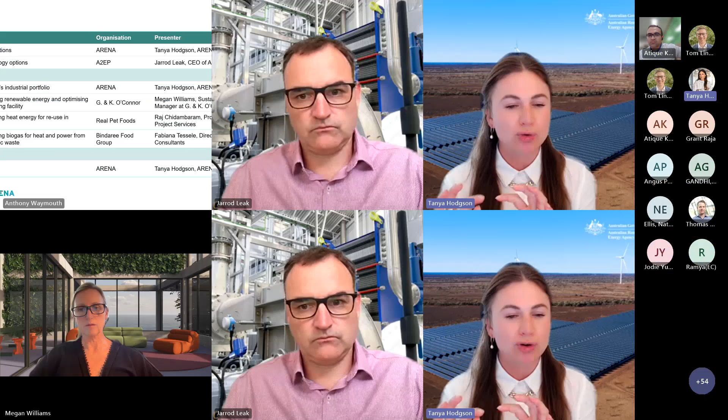questions. Okay, I've lost Tanya. Anyone else?

Hi, yeah, I think we lost her. Yeah, she's gone. Jarrod, this is Atique, I'm from Real Pet Food. We have our engineering department head trying to join the meeting, I don't know whether you can help out with that. I can help with that, Atique, I'll send a link in the chat for anyone to pass forward to others if that's a suitable solution. Well, hopefully we have the rest of the ARENA team as well who might be able to help. But let me get on that link for you while Tanya reconnects. Sure. I'm sure Tanya's thinking, yeah, my internet was fine all day until now, and then 100 people join a call. Yeah, exactly, that's strange. Tom, maybe you want to take the lead there? I don't know, we've just heard from Tanya, apparently we've had a blue screen of death incident.

So we'll pass on to Jarrod and get started with that one. Fantastic, all right, thanks Anthony. We'll skip through to the next slide there, and just a very quick introduction on A2EP.

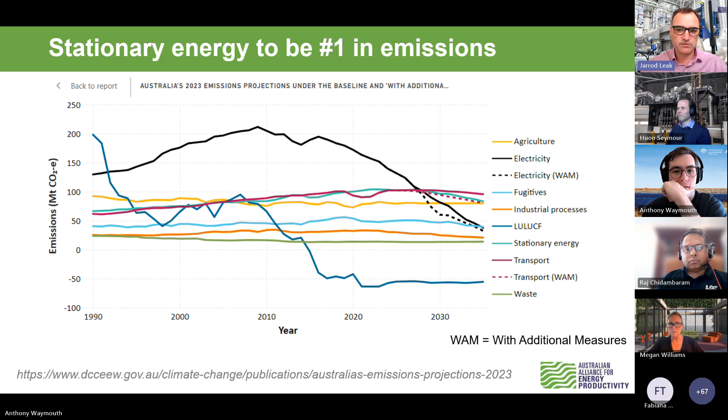If you look at the next slide and see where we've come from and where we are in Australia, we are probably a bit behind what Europe has implemented in terms of technologies and options, certainly when it comes to biomass. But we're probably ahead of the US, who had a decade or so of stagnation there. A lot of the work was done in terms of publications around 2017 to 2019, mapping out the opportunities and the technologies.

And there's just a few of those publications shown on the top there, and then they've been built on over time. With ARENA, we did a series of 30 or so studies come 2020 and 2019, where we looked at all the different options for technologies, and that's where we had a lot of our foundational knowledge on what works and where and how. We've been working hard to build on that over the last 4 years since then.

Other work has been done by the Race for 2030 CRC, and if you were to look up their opportunity assessment for decarbonising heat, there's some great information on there. Finally, there's the harnessing heat pumps for net zero by the Energy Efficiency Council and A2EP, published a year and a half ago or so.

Along the bottom, just a few sample projects. The very first heat pump, industrial heat pump on ammonia, went into Thomas Foods installation in South Australia in 2012, a Mayekawa compressor project there. So we've had them around for quite some time.

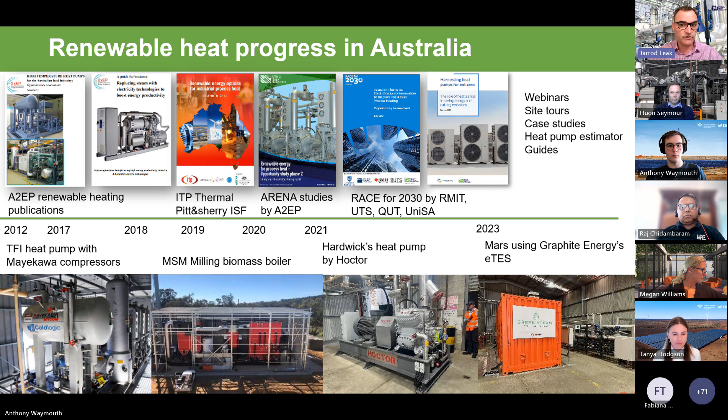Latest work done by A2EP is a boiler mapping exercise. We think we've reached somewhere around 20 to 30% of the major boilers and burners across Australia to find out what their intentions are in terms of decarbonising their heating and a little bit of a time frame for that.

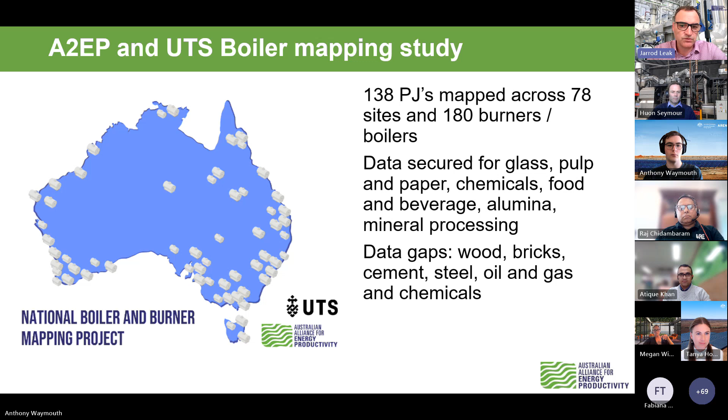The data that we had did cover a fair bit of industry. Although there was some gaps, we didn't do too much in wood processing and bricks, cement, steel, or oil and gas, but we did cover off pretty well through alumina and food and beverage and chemicals and mineral processing. So we think we got a fairly good snapshot.

On the next slide, you'll see one of the key findings was that nearly 40% of the burners and boilers out there are due for replacement in the next 5 years, which is the good news. Certainly, if you've just bought a boiler or a burner in the last few years, that's going to make the financial case extremely hard to bear new technology as well as the depreciation on the old technology. So plenty of opportunity certainly here and now.

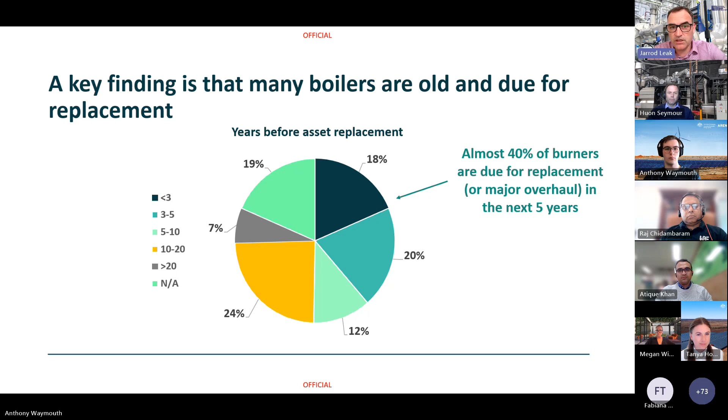On the next slide, you'll see a bit of a vector of where things are headed. Electrification was by far the number one, followed by biomass and then biogas. A very large chunk is still undecided, and that was through the many interviews we did over the last 12 months or so. So there's still a fair bit of work to do, certainly with studies and what have you. So electrification, biomass, and biogas - that's the three main areas that we think the opportunity is.

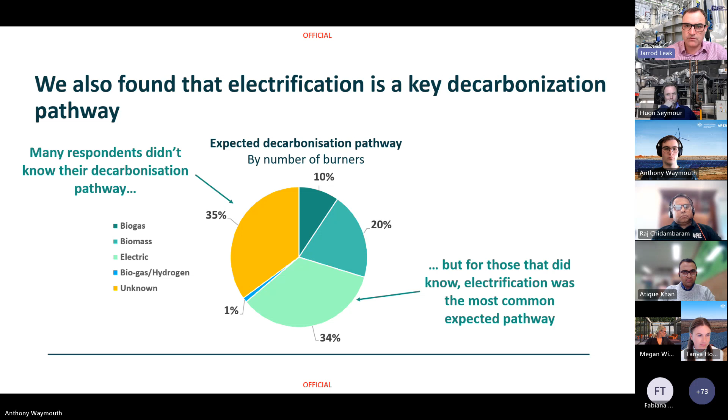But we see that moving towards bioenergy and additional renewable electricity. A lot of opportunities start becoming evident with energy efficiency once you start looking at things like electrode boilers or hydrogen as well, so we certainly can't leave that out. We also get a lot of efficiency gains as we use things like heat pumps or mechanical vapor recompression, which delivers, say, 3 or 5 or even 10 times the amount of thermal energy for one input of electrical energy.

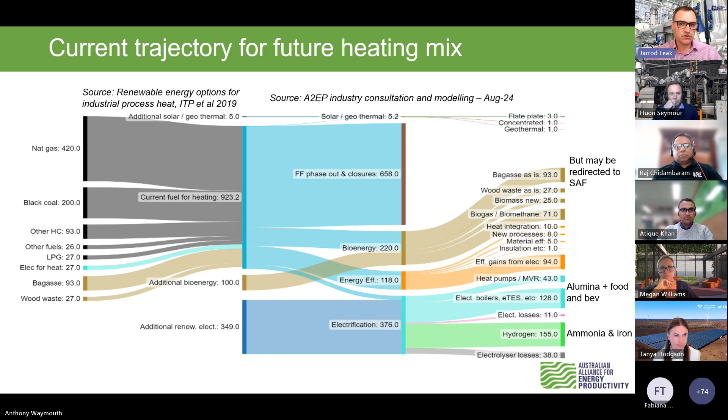A very big piece of work, good piece of work done by ITP there. If I just go back one slide there, Anthony, just to show that little bit of a breakdown there where we sort of see things headed.

For those higher temperature requirements for bricks, cement, glass, we expect a lot of that to be done by biogas and biomethane, some hydrogen, and some electrothermal energy storage. This mid section, around 200 to 300 degrees, you've got a lot of choice between biomass and boilers and what have you. And the bottom section, the lower temperatures, we certainly see heat pumps and MVR, solar thermal and geothermal to absolutely dominate there - let's call that 150, 200 degrees and below. That's going to be the most economical solution there, likely going forward.

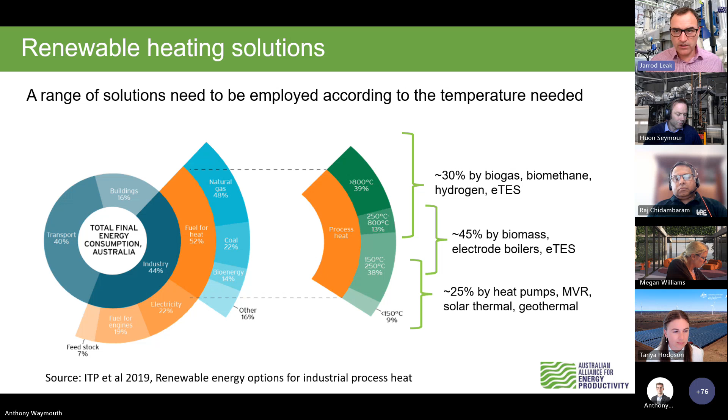A little bit on the specific technologies on the next slide, you'll see a breakdown on that CapEx and things. Geothermal is very cheap, almost no OpEx, just some pumping once you get it running, but the cost of drilling is quite expensive.

Great opportunities in Australia. The War Memorial in Canberra has just opened up with a fabulous geothermal heat pump solution, but also if you look at the Latrobe Valley, we've got an enormous resource there for straight geothermal, and it has been used for aquatic centre heating and the same in WA around Perth.

Biomass - we've got a fabulous resource. This is where we're definitely behind most of Europe. They've really gone to good lengths to get the most out of their biomass resources, and I mean waste biomass, waste wood and sawmill offcuts and residues. It is a more expensive technology, but with a low feed or fuel cost, it is very economical.

Biogas and biomethane - excellent for these high temperatures, but the cost to develop a new project that will give you the gas you need is quite expensive, and there is definitely regulation problems holding that back at the moment.

Solar thermal really can be quite economical, definitely below 100 degrees, even up to 200. We see that playing a reasonable amount in decarbonisation, even though it's been rather quiet over the last 10 years. We think that's going to happen more there - we're watching that one.

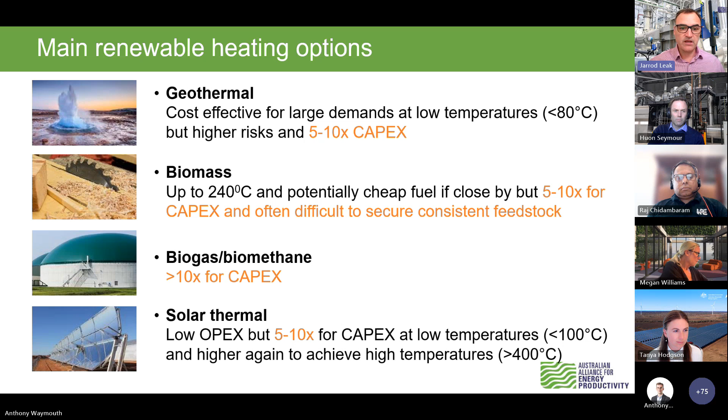For electrification options on the next slide, you'll see we've got the likes of hydrogen - essentially unlimited as long as you've got the water and can get the renewable electricity there. But the high cost per gigajoule, we expect that to maintain for many, many years, probably looking at a 2030, 2040 type solution for the technology.

Heat pumps and MVRs - that's absolutely here and now. The products are here, the solutions are ready, and we're now getting a lot of installation examples out there to learn from as well.

Heat pumps are really pushing into that 160 degree range, with more happening in steam-based heat pumps. And then mechanical vapor recompression is pushing towards 240 degrees as well. So that's moving along pretty well.

ETES, electric thermal energy storage, is great for those higher temperatures and for those mid-ranges as well. You've got the likes of graphite I showed before, MGA Thermal and Rondo on the big end, and I've got a slide for that.

Finally, the other one is electrode boilers, the other main electrification option. We've already had these in Australia, like at Tasmanian dairies, and we're seeing some more installations likely to happen in the next 12 months as well. Definitely higher in the capex compared to a standard natural gas boiler, but certainly a great decarbonisation option, and gives you that drop-in fuel situation where you provide steam at the same temperatures and pressures as before.

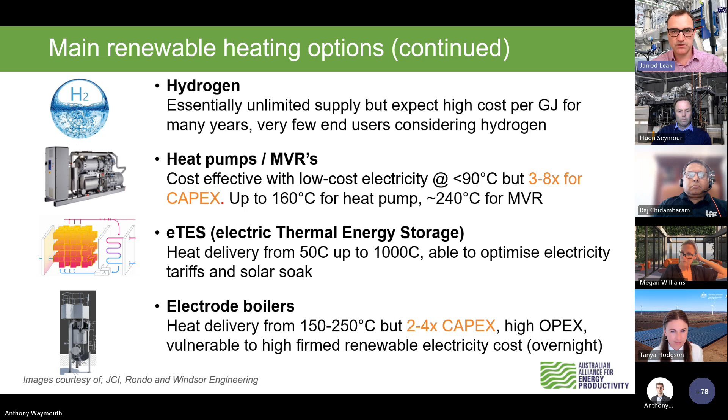On the next slide, I'll just jump over this one quickly, and I think most people will get the pack. I've just tried to show where these different solutions and options sort of fit in, with a little bit more granularity of different types of heat pumps and the like.

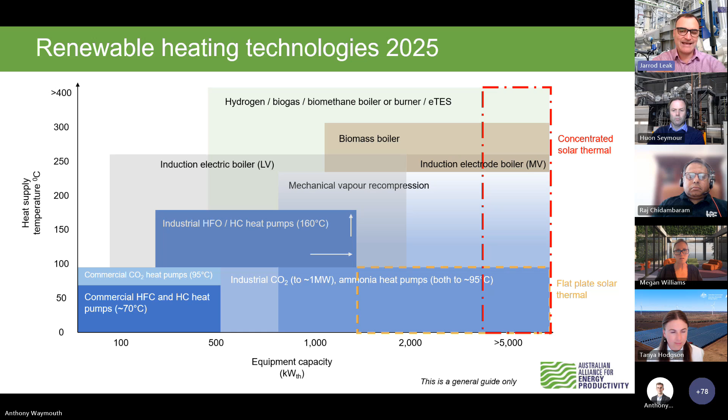So if we get into a few examples now, you'll see this next one coming up is a mechanical vapor recompression project that went ahead in New Zealand a year and a half ago, used for a sugar refinery, and can perfectly be replicated across our refineries in Australia - 5 or 6 refineries that we have - but also in many other applications.

Wherever you're doing evaporation, that could be fruit juice - sugar mills could employ this to free up more of their bagasse. But anywhere you're doing evaporation around Australia, this is going to be an excellent viable solution. I draw your attention to that 18 times more efficient than a single step - like a COP of 18, it's really one of the most unbeatable technologies to decarbonise that we have available.

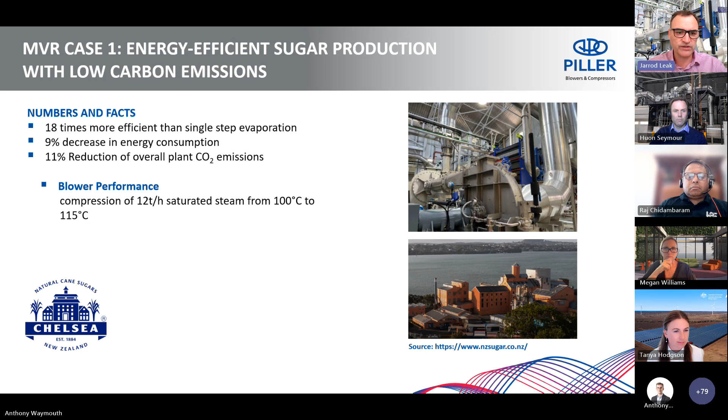On the next slide, you'll see that this is being considered on a very large scale, and Alcoa has been looking at this for running their digestion and spent liquor evaporation plants. They see it as a very good opportunity, and they've been doing some trials over the last year or two, with ARENA's assistance, which we think will lead to more projects down the line.

This is going to be a big part of the decarbonisation story.

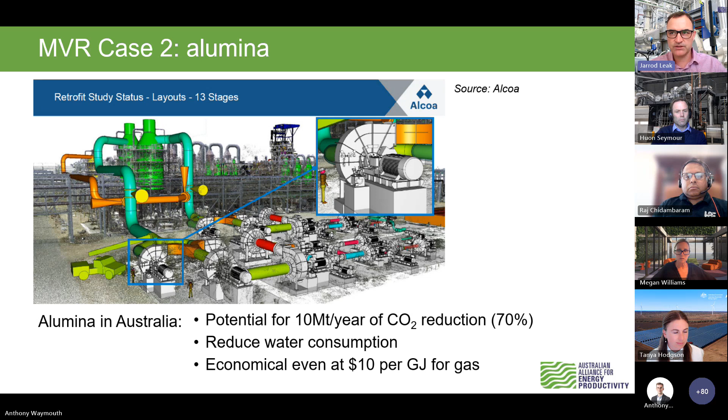Moving to heat pumps, here's another ARENA-assisted project at Kyneton for Hardwick Meats, now owned by Kilcoy Global Group. They have hot water needs for their abattoir, with the heat pump producing 75-degree hot water, currently stepped up with a gas boiler to 82 degrees. But there's further growth in performance from that heat pump, made by Hoctor with a Mycom compressor, now pushing up to about 80 degrees already.

Not much gas used there at all. This is a fabulous system, fully integrated with solar, wind and batteries, along with existing waste heat from the refrigeration plant. A fabulous project with very good results, very happy with that one.

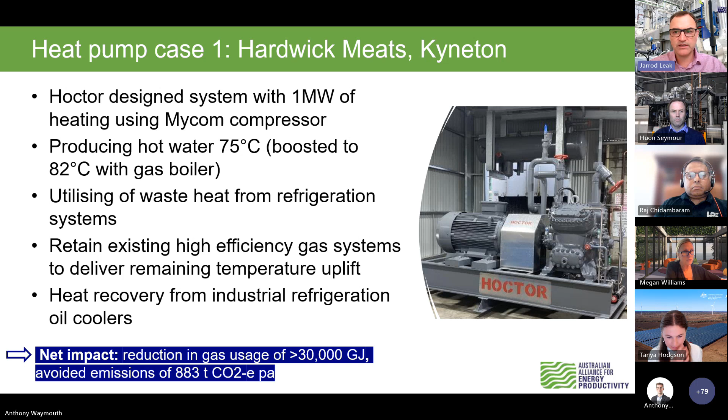On the next slide, a bigger example - not just 1 megawatt, but up to 130 megawatts. This is MAN Energy Solutions' heat pump to produce steam, and right now Fonterra in New Zealand is going through a study to see how they can utilize this technology. So you can take heat pumps from your house for a kilowatt or two all the way up to 130 megawatts. It's quite the technology, and with high COPs, we'll see more of that.

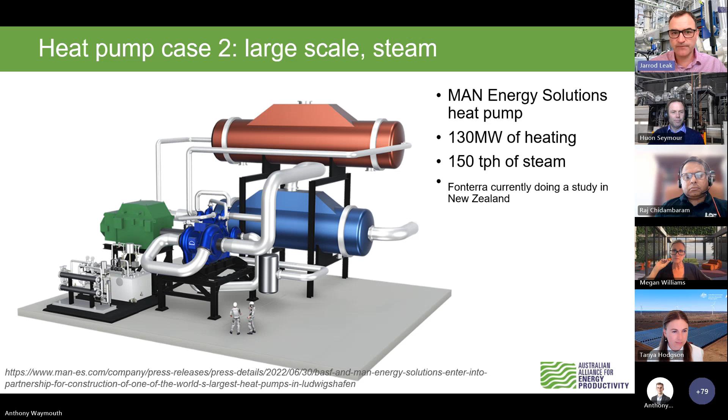Introducing Mars - here's Paul Matushka, one of our absolute leaders around the country for pushing these solutions. You'll see the graphite energy installation at Mars Wodonga, providing steam straight into the existing network, with really good seamless integration, delivering steam at a very similar cost to their previous boiler.

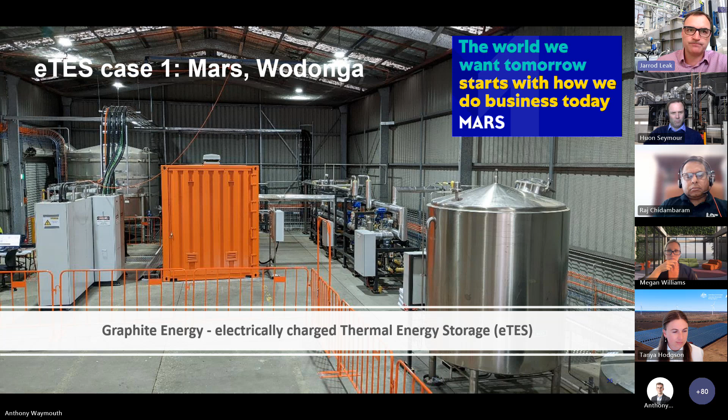Electrode boilers now - just one case for you. We had this at our recent Renewable Heat Conference: Paddy McMillan from MVM in New Zealand. This was an exciting project, up to 14 megawatts from a steam electrode boiler, getting fabulous results and loving it. The interesting point, most people found, was that it required 17 different partners to bring it all together - quite complex, and a successful project needs a lot of partnerships.

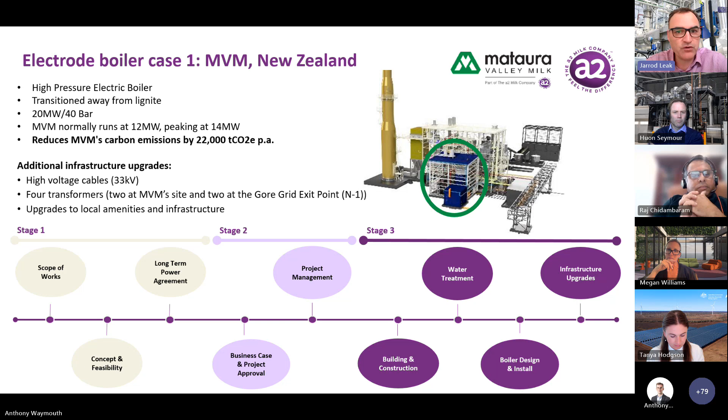To finish with a couple of biomass examples - this is one from Enriva for Van Wyk Flowers in Lyndhurst, Victoria. This is a 3 megawatt biomass boiler providing heat for the glasshouse in the evening, and I understand also CO2 during the day for fertigation to help with glasshouse growth rates. That requires a big thermal storage - some 2 megalitres of hot water tank - an enormous tank, but that's what you need to build up heat during the day and use it overnight.

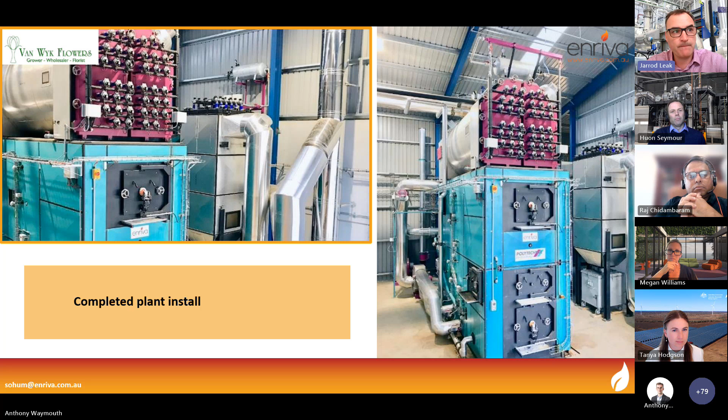Finally, a second last case study that can be done on a very large scale as well - here's 80 megawatts of biomass boilers being done by Borg in Mount Gambier for their processes on particle board.

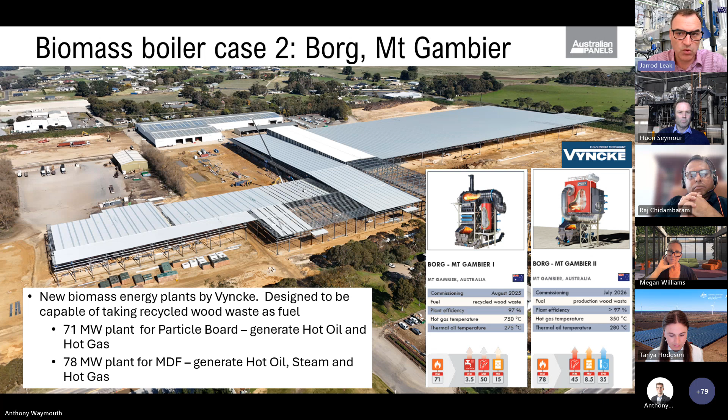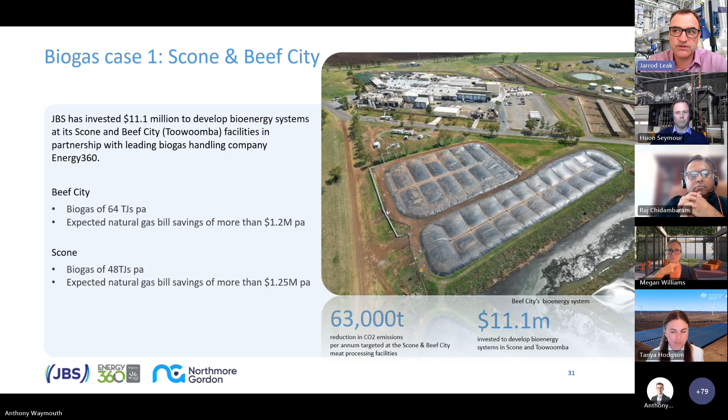The very final one is a biogas case, and this is from JBS, the biggest food company in the world. They're moving on with capturing their waste and using a covered anaerobic lagoon to get the biogas from that, and use that in their boilers to displace natural gas. Getting great results, great returns, and we're sure we'll see many more of those projects happen in the meat processing industry.

And I can take a breath now. Sorry about the overload, but that gives you hopefully a good flavour for what's happening and where we're at with things there.

Is Tanya back online? That's the question for the day. What a perfect time to blue screen. It's Murphy's Law. Thank you so much, Jarrod, that was excellent timing to the minute.

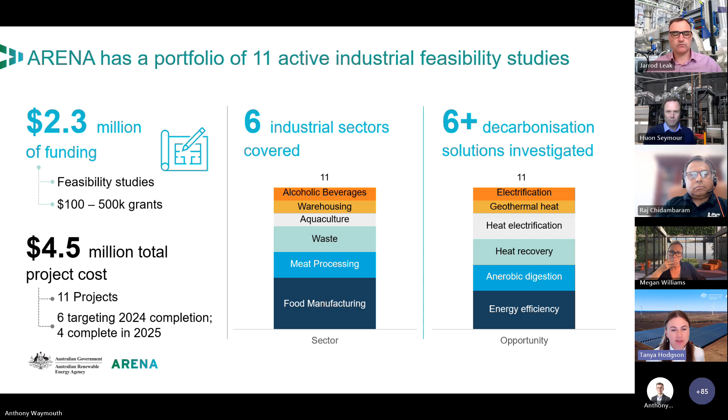So maybe Jarrod, just before we move on, and this was the end of my pitch for ARENA's portfolio, there was a question just asking why Van Wyk Flowers went for a biomass boiler rather than heat pumps. So perhaps we address it here before we all forget the context.

Yeah, absolutely. I don't know the specific reasons, but I do know generally why that would happen, and that's often about the electrical constraints. So that project was a 3 megawatt boiler, and so you would need at least a 1 MVA connection, and that's probably a little bit hard if you're out in the regions, and that would be much larger than what a typical horticultural grower would have already, so may have required that upgrade there.

Heat pumps are also more expensive per kilowatt or megawatt of energy supplied. And the other one would be that biomass may well have the edge because of the CO2 that you can get from that, and fertigation and the improved growth rates that you'll get when you have that higher CO2 concentration inside the glasshouse.

Certainly, we've seen several glasshouse and nurseries go ahead with heat pumps, say when they do have that connection available, and they may not need the CO2. So we've definitely seen projects go ahead - I think it was Zaldesh Farms in WA, just one example, went ahead in the last 6 to 12 months with their heat pump installation there, and that seems to be, from what I understand, performing very well. So yeah, it's worth considering, I'd say, for horticulture, both options, and seeing what suits best.

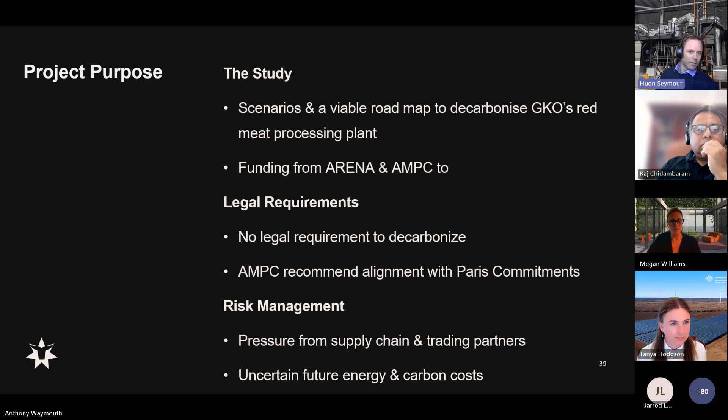All right, we'll step on to milestone 1. So milestone 1 was to implement a metering and monitoring system.

This was needed because there was no existing baseline or measurement to create one. So we had to go about measuring the existing plant operations, specifically plant activities on site, scope 1 of burning natural gas, and emissions from the grid. We didn't cover scope 3 emissions as part of this study.

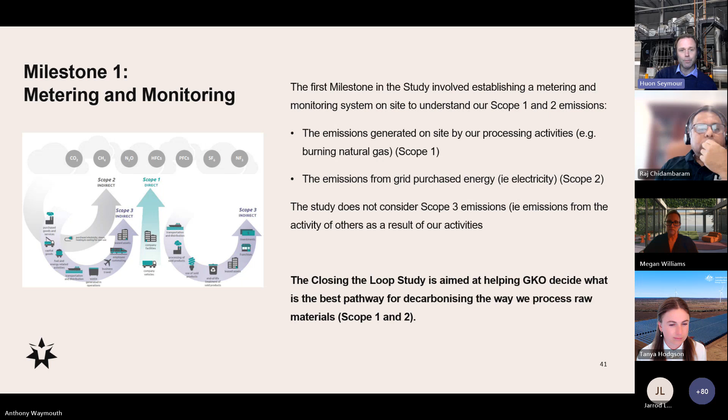What the metering and monitoring system encompassed - beforehand, it was literally people with clipboards. There was a manual system. They would, on an ad hoc basis, collect data, and it wasn't centralised anywhere.

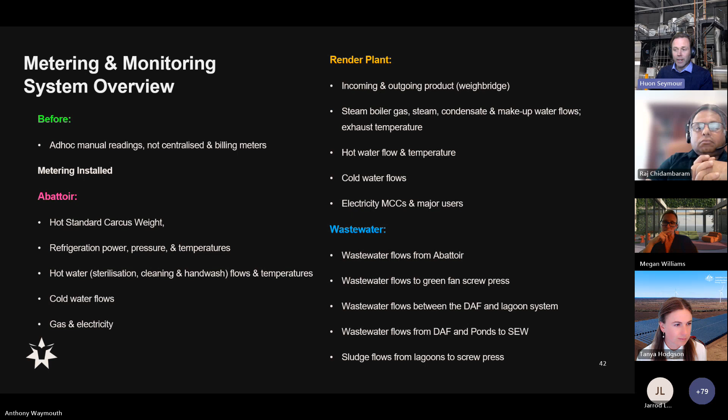Afterwards, we implemented a system in which we monitored electricity and gas across the abattoir, render, wastewater and refrigeration plants, hot and cold water in both the abattoir and render plants, gas on each boiler. There are 3 of them on site. Steam, we monitored the entire steam boiler in the render plant, and products in and out of the abattoir and render plant and wastewater flows.

The monitoring system itself that we've created here has automated and centralized data collecting in a historian. It displays trends and reports data using an automated dashboard. The dashboard provides energy trends and breakdowns, KPIs or energy performance indicators for the whole site and each of the abattoir, render and wastewater plant, a build your own chart function with all of the data points available, and an ability to download data for further analysis.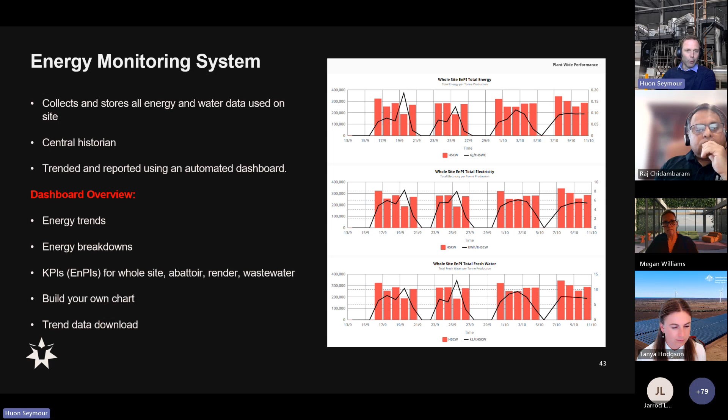And the wastewater system has a great deal of heat being sent down to wastewater, and as well as you can see losses in the boilers and the waste heat evaporator on site.

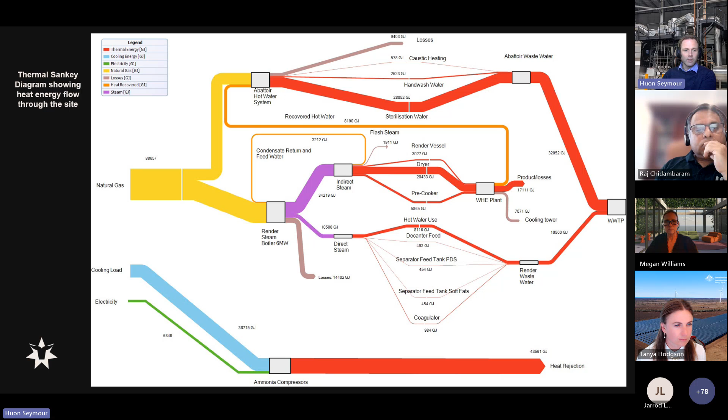Stepping forward, this is looking at milestone number 2. This is the integrated scenarios portion.

In order to provide the necessary detailed understanding we needed, we had 4 technical reports completed as part of this study. Johns Environmental did one on covered anaerobic lagoon and biogas. Northmore Gordon, my company, completed one on thermal process integration and electrification. We had Beam complete one on solar PV, batteries, cogen, and an economic feasibility, and we had Enhar produce a grid and peak demand study.

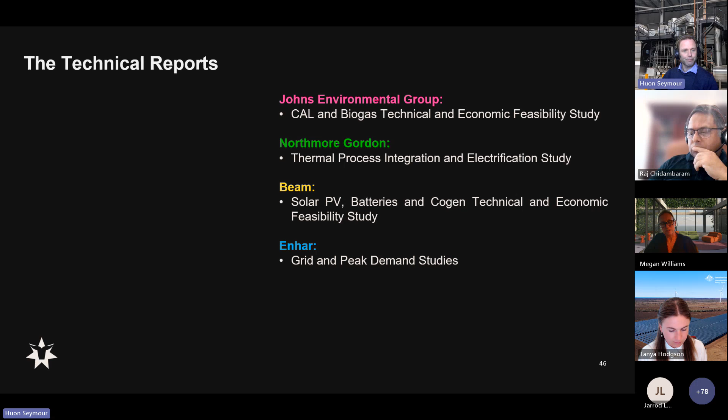Technologies we assessed as part of the roadmap were solar - on-site PV, and thermal storage that inputs electricity and outputs steam that Jarrod spoke about earlier. Biogas - a covered anaerobic lagoon to produce biogas for use in the steam boiler. Energy efficiency projects such as waste heat recovery, heat pumps producing hot water combined with thermal energy storage. Electrification - directly converting natural gas uses across to electricity, such as electric boilers. Biomass boilers, in the other category there, that's using logging waste.

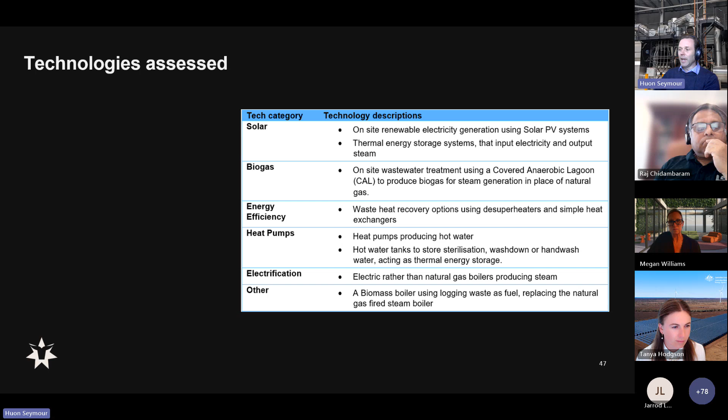We ruled out electric batteries due to payback and the sizing for the required storage we needed, and we didn't proceed with cogeneration due to concerns about reliability and energy cost exposure.

For integrated scenarios we considered with this study, we had basically a technology focus for each one. Solar led maximises the amount of solar capacity installed and utilises the excess solar for thermal storage. Biogas led, using a covered anaerobic lagoon with the on-site waste processing to substitute a portion of the natural gas, used for steam generation in the render plant. Efficiency led - cost-effective energy efficient technologies, and we put the biomass boiler into that scenario. And the final one is full electrification, which was replacement of all natural gas consuming equipment with electric alternatives, on-site storage and procurement of renewable energy or on-site generation.

Our evaluation methodology used a multi-criteria decision matrix, scoring each project in each scenario against the criteria important to G&K O'Connor to produce a combined scenario score. We then applied a values assessment across the scenarios. This enabled us - I think it's worth mentioning that one of the really effective things we did in this process is we basically had a project group made up of experts.

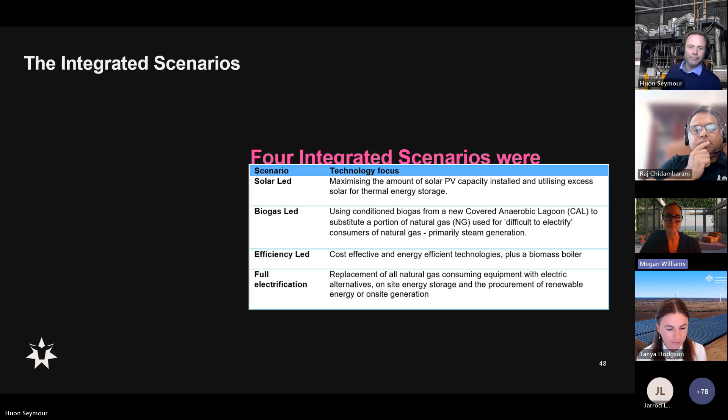So Northmore Gordon, Johns Environmental Group, Beam, and myself representing GKO and Enhar were at the table. It was really good to have all that expertise applying the methodology. I think it worked well and we got an intelligent, balanced result. Each of us have our own preferences, but we were able to check each other and come up with a solution with G&K's priority in mind, challenging each other quite a bit.

So I'll move on to the next slide, the summary of our analysis. Do you want to take this one, Megan? I can take this one if you'd like. I'll hand it to you for the next one.

The outcomes we've shown here are monetary and emission savings. We don't have a particular regulation requiring change, so the pathway was driven by business drivers, looking for the scenario that delivers the best value for money. These charts show whether your priority is cost saving or carbon saving, because the two don't necessarily align between the different scenarios. The other category includes biomass boiler in the energy efficiency led scenario, and thermal energy storage with spot price exposure in the full electrification scenario.

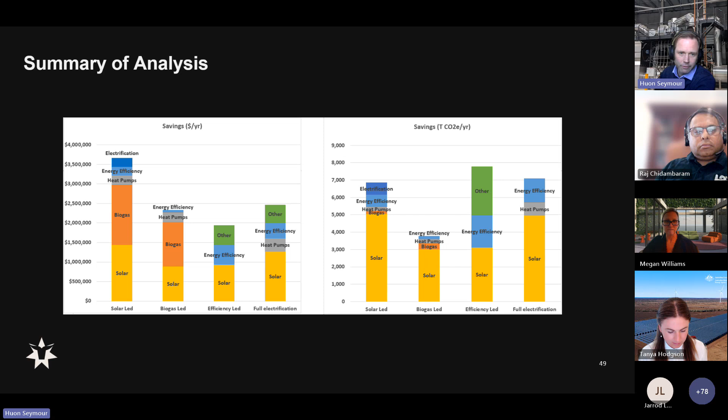Move on to the next one, Megan, which you can cover please. So this is a summary of our analysis. What came out is there was no single clear technical or financial solution to transform to low or no carbon emissions. The outcome of the study really demonstrated that the efficiency-led approach is the first path to travel down, consistent with Jarrod's findings. It's got the best payback, the most efficient capital outlay, and it's most positive in terms of net present value.

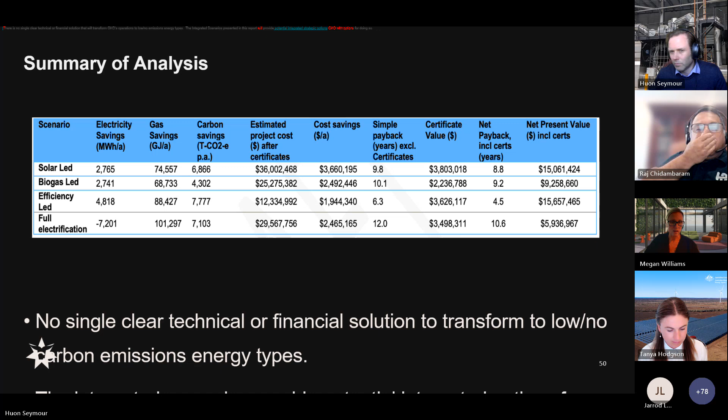Just move on to the next slide. So the approach we're taking is to enshrine energy management into our organisation as business as usual. This Bill Gates quote is quite a good one: most people overestimate what they can do in 1 year and underestimate what they can do in 5 to 10 years. I think it's definitely an incremental path.

We've got positive feedback from our senior leadership team in relation to implementing the efficiency-led scenario. I think the fact that it's proven technology gives them confidence. It's the most appealing payback and highest net present value. The first thing we really need to do is introduce an energy management system, which we see as the catalyst to cultural change on site.

The other thing, which draws on Jarrod's discussion, is that Jarrod mentioned 40% of boilers they've discovered are getting towards the end of their life. Well, 65% of our gas use on site is from our render plant boiler, a 6 megawatt boiler coming to the end of its life. So one of the immediate actions we'd like to bring forward is doing a deep dive into how we avoid replacing it like for like with a brand new boiler. We've already got a grant from Sustainability Victoria to look at mechanical vapour recompression in the render plant.

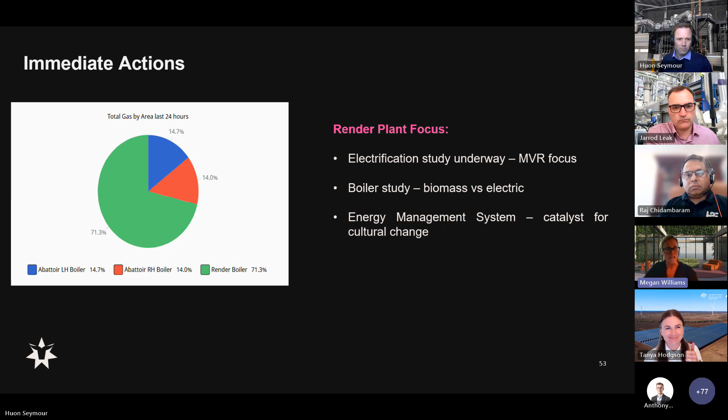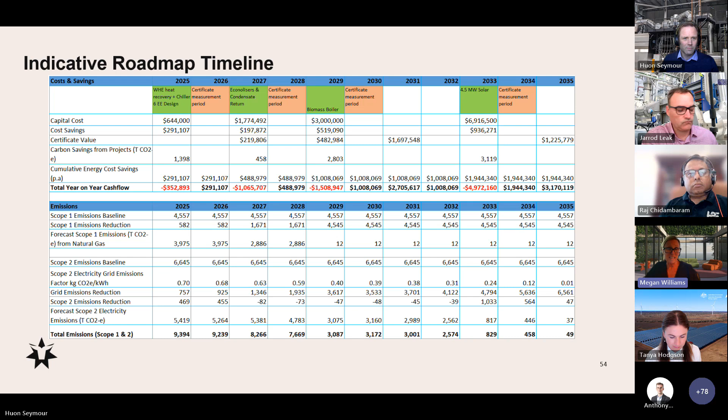A massive free kick that we get is this emissions factor - the fact that the electricity grid is greening in any regard. So we reduce our carbon emissions by that. Really the main issue is our gas consumption. We need to get off gas.

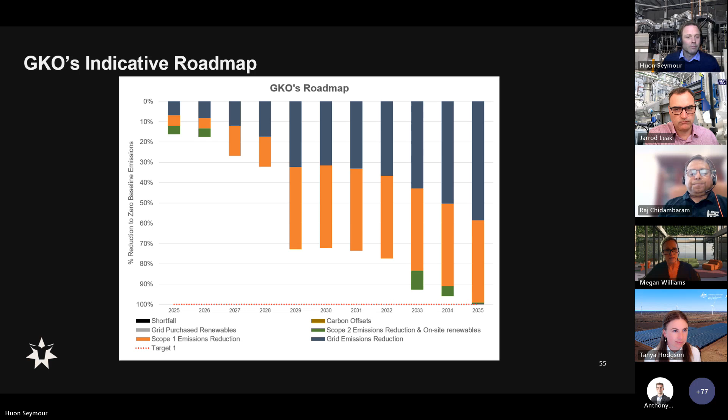Let's move on to the main lessons we've learned from this project. We've learned that metering and monitoring is the first step to quantify carbon emissions and develop a decarbonisation plan. We've been through real complexities in retrofitting a metering system into existing operations. It's been tough, it's taken a lot of collaboration between players. We realised that training and cultural change is absolutely critical to decarbonising. There's no single clear technical or financial solution, no silver bullet that will transform our operations. We see it as an iterative journey that makes most sense for medium-sized businesses, starting with minimising our demand through energy efficiency, energy productivity, and production improvement measures and adoption of proven technologies.

And thank you for being here today and listening to our presentation.

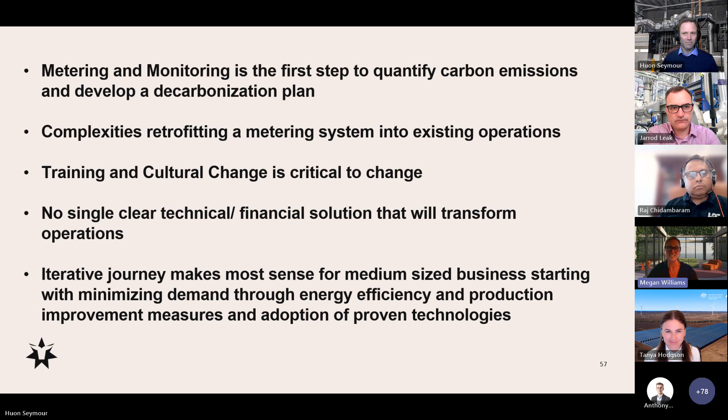Thank you so much, both. I think really informative and helpful to see what this looks like in practice and how you start that journey. So definitely a wealth of expertise. We're going to move on now to our second case study.

We'll hear from Raj, who's the Sustainability Projects Director of HPE, who helped support the work at Real Pet Foods. They received a $250,000 ARENA grant for a $500,000 study. Handing over to you, Raj. Thank you.

Real Pet Foods is a rather largish gas consumer with about 220 terajoules a year of gas consumption, quite energy intensive in terms of producing pet food. This study covered two sites, one in Sydney in Ingleburn and the other in Yatala in Queensland, but they do have other sites as well.

The main objectives here were really focused on Scope 1 emissions, analyzing heat and mass transfer to achieve a first principles approach, identifying opportunities. We wanted to target about 40% reduction, reuse and recycling of energy. That was quite an optimistic number that we were aiming for.

Mainly focused on Scope 1, and then looking at setting the scene for our Scope 2 emission reduction in terms of offsetting and alternate fuels. So detailed design of all the projects we'd undertaken - we were spade ready to go forward, having capital estimates, cost benefit analysis and investment proposals ready to go, and also then quantifying the remaining footprint. It's not that dissimilar to a lot of other studies, except that our focus, coming from a process engineering point of view, was very much a first principles calculation approach alongside metering.

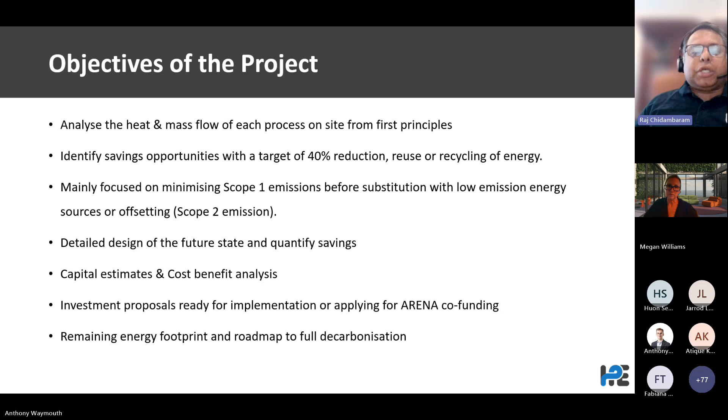So the approach we took is essentially do a process mapping, calculation of heat demand, and quantify the energy footprint from first principles, and then compare them against metering that we had installed. It was a bit of an accident, unintended, where metering took a little bit of time to actually come online, because as part of the project we were doing both the study and installing the metering, which actually did force us to do a lot more detailed investigation and observing to get our energy and mass balance accurately. Then when we compare it against metering, we were able to see how much were the exact losses, and are these losses what you'd expect naturally from conduction, convection, and acceptable losses versus losses that are not.

Step back a slide, please. In terms of... seem to have stepped a slide forward by mistake.

So essentially identifying opportunities where we could reuse heat within the same process - what temperatures were needed, how much was wasted. So I call that reuse or reduce, because in the same process it's in balance.

The second opportunity we'd look for is to reuse it in another process where there is the need, making sure the two processes are aligned in terms of demand and supply. The third is to look at what low grade heat in terms of low temperature heat is generated that could be recycled with the use of some energy to boost that back up.

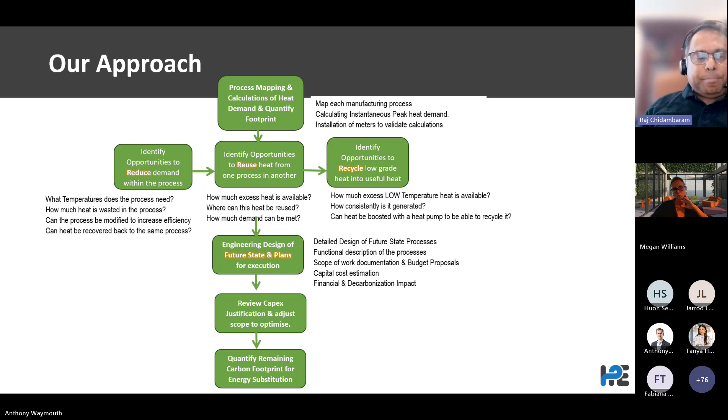So just a summary of where we got to. We did build a very detailed heat and mass balance from first thermodynamic principles. We found many initiatives that we'd originally thought would be feasible when we went into this process didn't quite work as we expected.

Energy metering is vital, as the previous speakers did say, but there was a little bit of an unexpected benefit in the metering coming a little bit later. But yes, metering being installed first is absolutely important.

We found ways of measuring instantaneous mass flow of product versus energy. So that was harder than expected. Not often all processes have all of their parameters monitored or controlled.

So getting down to that nitty-gritty of per kilo of product, how much heat was being used from a first principles point of view was a little bit more challenging than we expected. We should have and we would in future allow a little bit more time to be able to do that properly, which we found very useful because we are able to understand the process down to a very deep level.

So again, without that deep level of understanding, it's very difficult to know where our waste in terms of losses were. And funnily enough, some of the biggest losses were actually hiding in plain sight. So in these cases, just metering may not have given us any benefit because the losses were already built into the process. So going back to first principles was absolutely the right thing to do.

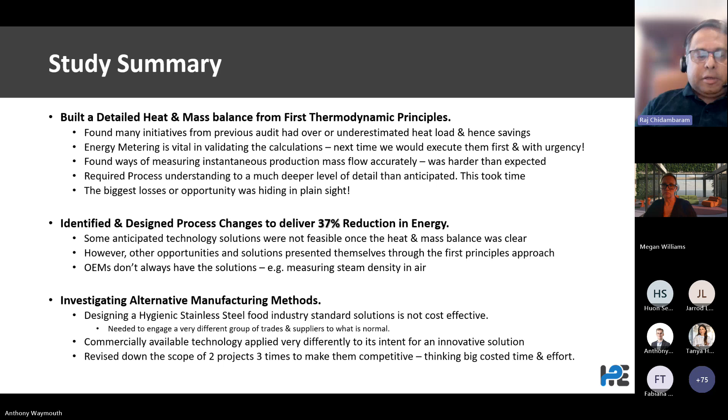We did ask at the heat conference about the experience from our New Zealand colleagues who are a little bit ahead of us, and it was surprisingly very similar. You touch hygienic installations and it becomes ridiculously expensive. The trick is to see how much we can do without being hygienic. So I'll step through a bit more that might explain that.

So what were the general learnings for us? I did mention before that detailed process knowledge, heat and mass balance data should guide our solutions, but we tended to start with a few grand ideas of what we thought would have worked from energy audits.

So one of the key learnings is energy audits don't give you the full picture. They are a top-down audit, whereas what we've done is a bottom-up, and we've been finding gaps that you'd expect to find from the two approaches.

So vapor recovery and mechanical recompression is something we considered would have been a good idea for our dog roll cooking process, where there's actually steam that is drawn back off the process, or vapor being drawn off the process. So that seemed like a good idea at the time.

But then as we worked through it, we found that the MVR technology was only really effective larger than 5 tons an hour of vapor recovery, which precludes a lot of these processes at the moment. Hopefully processes will get developed as we go along.

Reciprocating compression solutions would be able to be applied for a smaller outcome, but one of the constraints there is they do require a positive pressure, and in these applications with vacuum, that really didn't apply.

HPE also had a similar experience with UHT milk sterilization, where it's a very similar process again, with direct injection of steam and recovery of vapor. The MVR technology was way too large, or the current state of the art is way too large for those applications. But watch this space in the future.

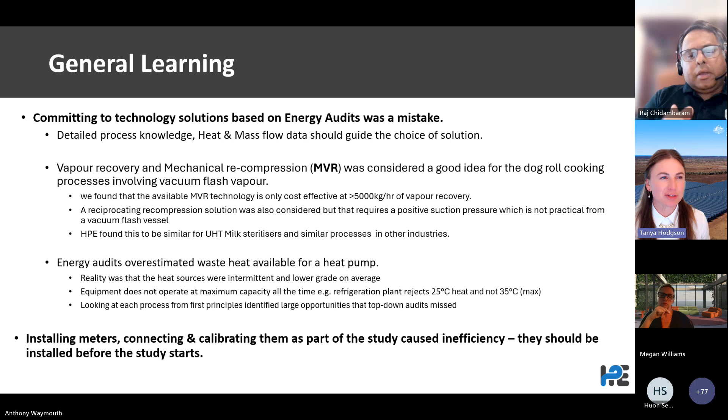Okay, so a couple of the key projects - I won't go through a lot of the technical detail. More than happy for the pack to go out and happy to take questions from people even after the session.

But one project that was quite a large saving was retort cooking, where cans or pouches or trays of pet food were sterilized in a retort process. Currently, all of that energy essentially is being rejected to the environment through a cooling tower, and that's about 900 gigajoules a week, or 58,000 gigajoules a year.

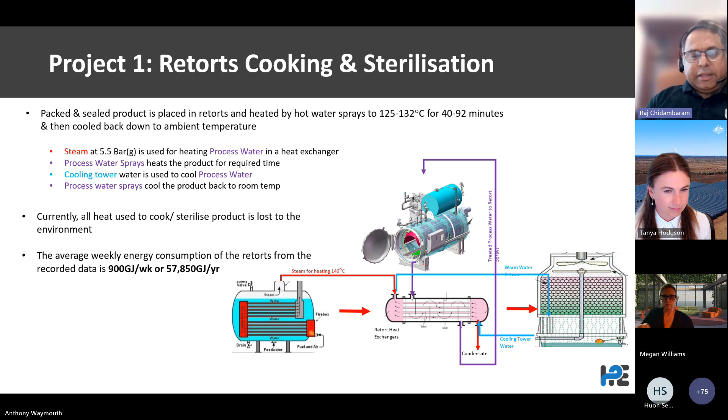So we've looked at a thermal storage system with 3 different temperatures and looking at storing that heat from subsequent cycles, boosting it, and reusing it in the process. So in that process, we will be able to achieve about a 40% reduction in the energy usage.

But the infrastructure required to store that amount of heat in a 200 kiloliter tank of hot water in the country would be quite easy to do. In the city, it does get quite a lot more difficult, and the distance and proximity does add a significant amount of cost to the capital.

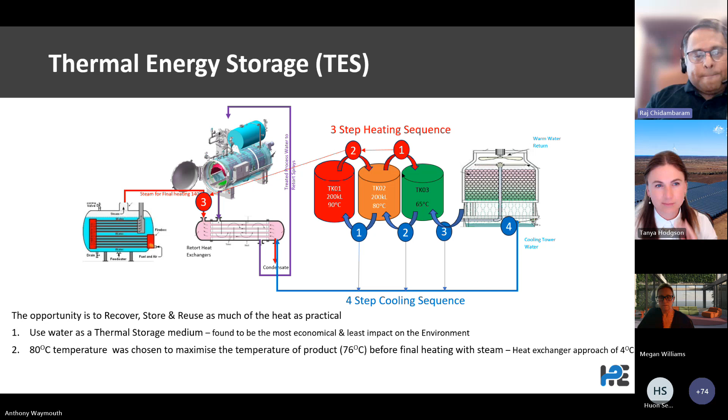Something we did that was very useful was to do modeling of how all of these systems perform. So we used a 5-minute interval with 30-second calculations and produced a model of how these systems would operate based on existing representative production data. So that was very useful.

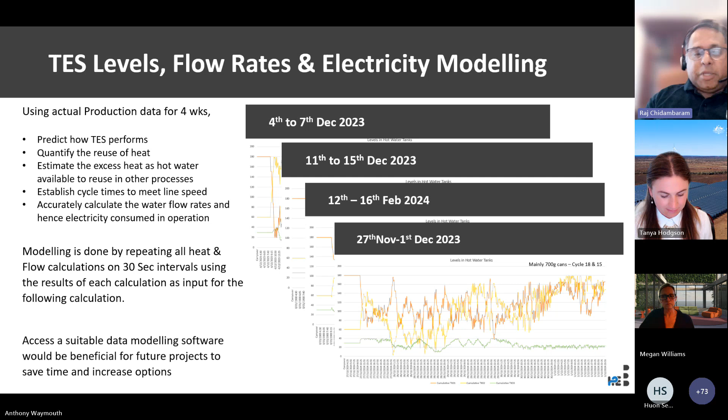But the big learning here is Excel isn't the best tool for a lot of these, even though it does work and did work well with our ground-up design. It isn't the best tool for the job.

Great main learning is we considered heat pumps to be a good idea at the start of the project, and we are huge fans of it. But essentially, what we found was with the TES design and optimizing the flows in the TES design, the amount of heat demand was fully being met by the TES. So there was really no need for a further heat source to be introduced.

In this case, simple process engineering beats advanced technology. Not always, but in this case, that was the case.

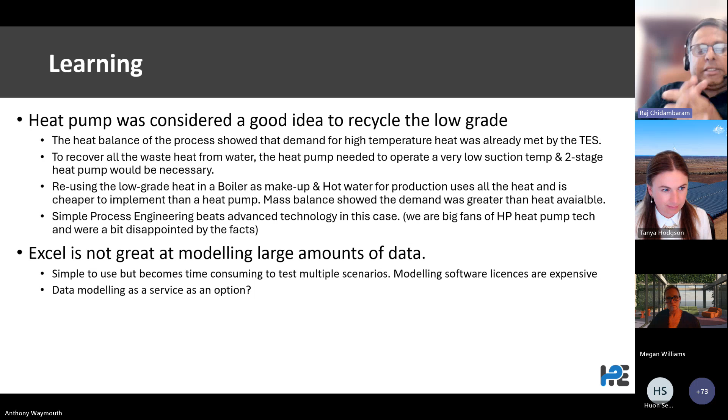The second process we really looked at is continuous tunnel cookers for meat products. Again, a lot of steam in this process. The key thing here is steam is lighter than air, and usually if there's visible steam in the room, that is wasted steam.

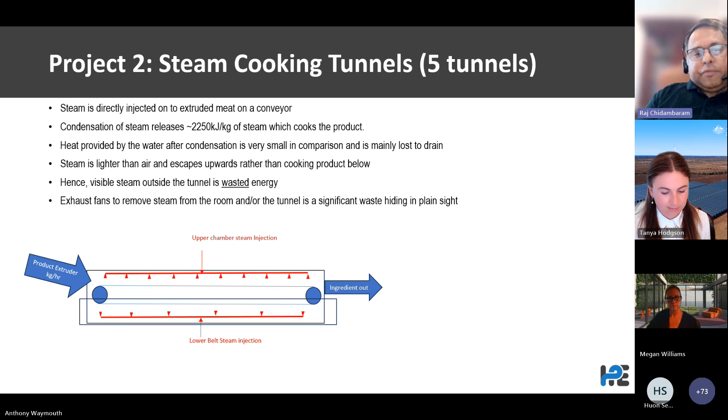But we did have a significant challenge in measuring how much steam in air was being used inside these tunnels. OEMs really didn't have any measuring devices. There's a lot of set-and-forget control systems. We looked at smoke detector technology that could be adapted, but that's a long way off.

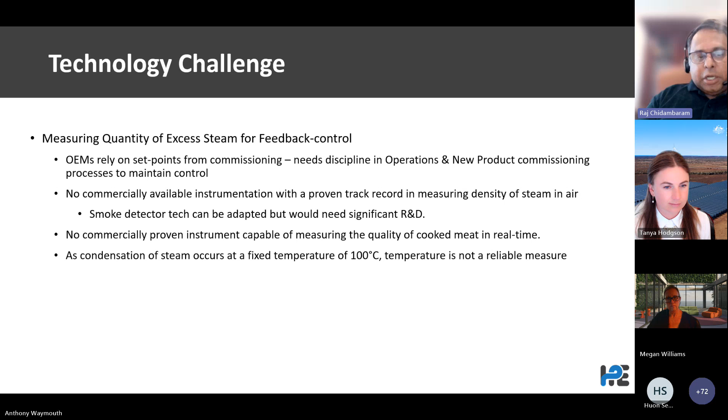So it was a bit of a technical challenge to overcome, which we did come up with an innovative solution for: condensing the excess steam and using that as essentially a measure of how much excess steam there is, then using a control process to maintain no more than a 10% excess, which would make sure air doesn't get into the tunnels. This is something we'd love to cross-fertilize with others who have similar experiences. It's a challenge we believe we've overcome, but we'd love to talk to other people.

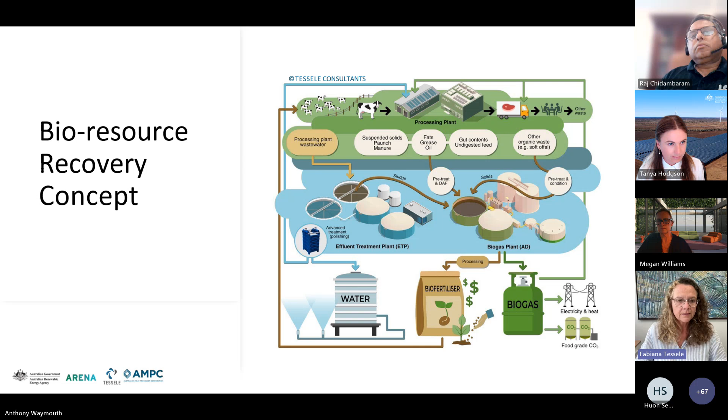So the water recovery plant uses a pre-treatment with an organic coagulant that doesn't have metals, so it's very easy to send it to the biodigester. We are using a conventional three-stage biological nutrient removal, so we partially remove phosphorus, and then we also do COD, BOD, and nitrogen. We are prioritizing ceramic membranes for the tertiary treatment because of the longer durability and lower energy footprint as well.

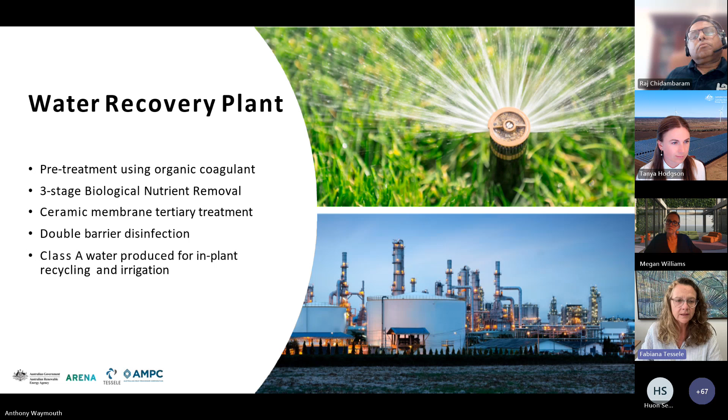And in the end, we end up with Class A water production. So this is a critical part of the process, even though this project is not about wastewater, but recovering the maximum of the high energy content in the pre-treatment plant and pure water.

The biogas plant and the bio-CO2 plant are really inspired by what's happening in Europe. Here I have a photo of a recent trip I had on behalf of AMPC to visit similar facilities in Germany. They combine biogas production using waste from red meat processing, dairy, and agricultural waste like crop stubs. But they also have a solar farm attached to it, which is super interesting because they use the biogas as their battery instead of having a battery in the plant. It's quite an interesting concept, but let's focus back here.

So in the biogas plant, we have pre-treatment from liquid and solid streams. We have a bit of conditioning and pasteurizing to produce a safe product. We are using the Victorian guidelines for safe digestate production, so we are already ahead of the game in New South Wales when this comes there. The anaerobic reactors are highly engineered with mixers, temperature control, the best of the breed, so we maximize the recovery of energy.

When you compare this type of reactor, you both increase the amount of biogas you can produce, but also the concentration of methane you can achieve in the biogas. So it gets super efficient, it's really interesting. And recovering CO2 by amine process in the end, and the post-processing for the digestate, of course.

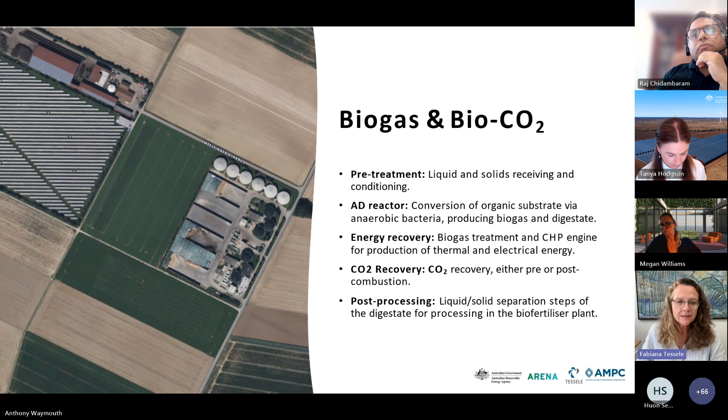So what we have tried in this project, we had a series of different substrates. It doesn't look very appealing - it's close to lunchtime here in WA. It's a mix of the contra shear rendering material, the red tricanter tallow, the manure, various solid byproducts, screened wastewater, the paunch and crop stubbles that they have on site, and the DAF sludge. So we mix all of this. The composition is mostly DAF sludge, but there is good variation and combination.

This is good because in this way we are managing several waste streams that were previously going to disposal facilities. So you are both generating renewable energy, but you're also preventing these things from generating methane in nature.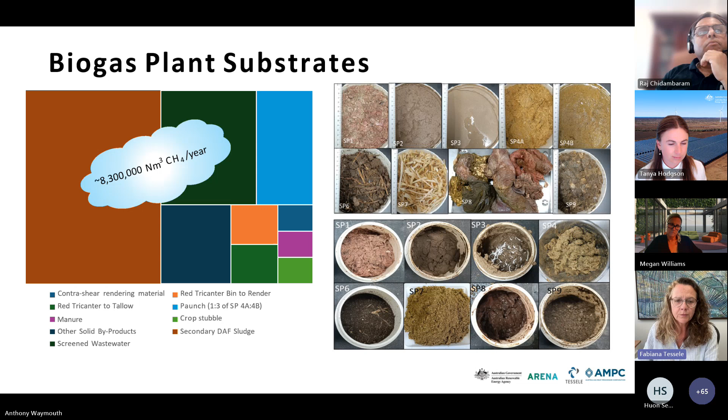From that, you can produce around 8 million normal cubic meters of methane per year, containing around 182,000 gigajoules per year of energy, which is around 2.3 megawatt hours in electricity from a CHP engine, and 2.4 megawatt hours thermal in terms of energy. That is almost all the energy that the facility needs to operate. So if we can optimize a little bit more the co-digestion with more substrates, we might get into a fully renewable red meat processor in New South Wales.

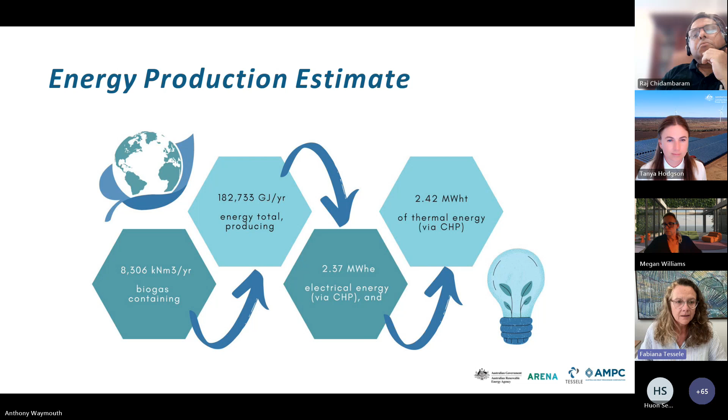For the bio-CO2, it was not really inside the scope of this work, but it was very interesting because the fact we can recover the dry ice used for transporting the meat made the project super viable. The return on investment related to the recovery of CO2 is incredible, so we decided to keep it in the presentation because that can add value for the wider audience.

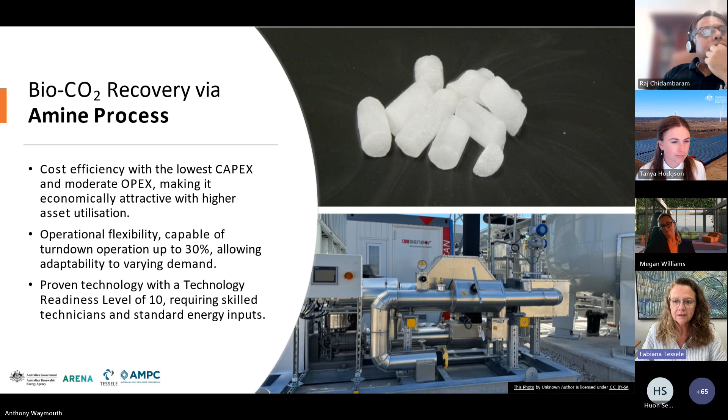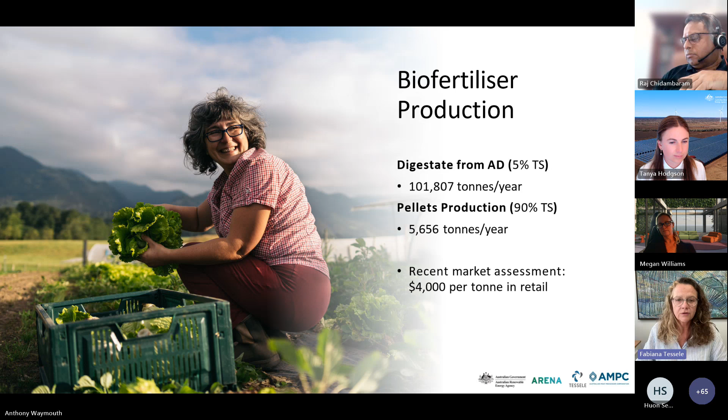And the biofertilizer production as well - we realized we can produce around 5,500 tons a year, and we had a recent market assessment where we can get up to $4,000 per ton in retail for this kind of product, which is super interesting.

So we did an economic assessment of this whole concept because, in our opinion, it doesn't matter if it's super nice technically - if it doesn't stack financially, it's not going to happen.

So we developed 7 different scenarios combining the different parts of the project in different ways, and also in the sequences on how we implement it - if we implement the full scale straight away, which is scenario 1, or if we stage in 2 stages, which is scenario 6, to accompany the industry growth.

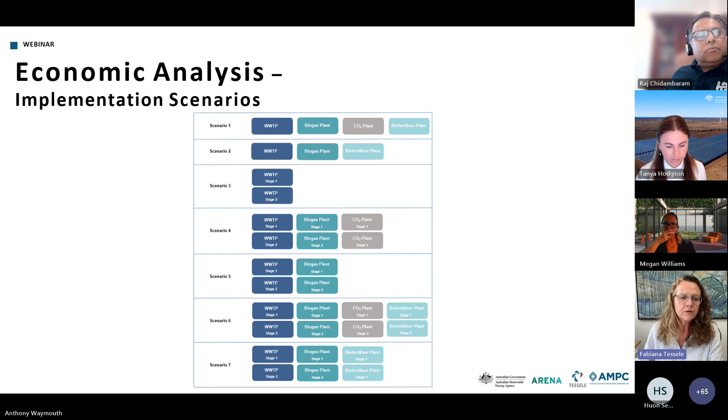So I'm going to present just the best results here in this slide. If we implement everything in one stage, you have to have an investment of about $60 million. In 2 stages, it's a little bit higher because you have all the mobilization costs that you have to do twice - project management, site mobilization, and all these things. So there is a slight difference between one and the other.

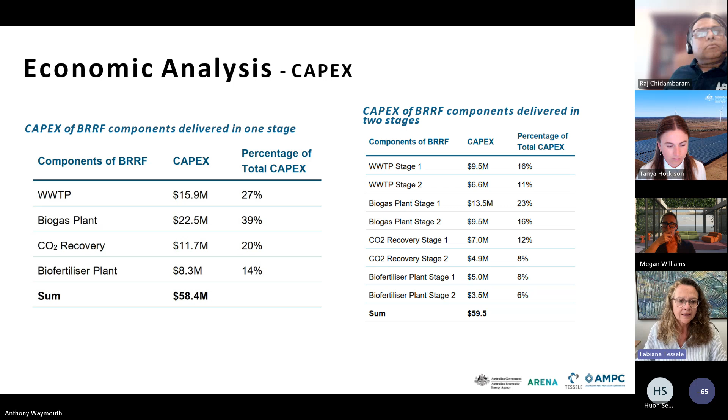And the resources that you can recover from that are quantified here. This is in current prices, and we didn't do a projection on what is going to happen in the future, but that can be more optimistic, I think.

So from recycled water, you can have a revenue of around $40,000 per year. And that is considering that they can only recycle about 15% of the treated water. Everything else is going to be used for irrigation.

And then the return on investment from energy is around $0.4 million a year for thermal and $1.2 million for electricity.

For the recovered CO2, that starts getting interesting. It's almost $3 million, more than $3 million per year. You can recover from producing your own CO2, and then you also have reliability on supply. You don't have issues when the market is fluctuating.

From the biofertilizer, we did this assessment at a lower price, so it's around $1.7 million a year. But we have now a different number based on a market research that could go up to like $18 million a year revenue from biofertilizer.

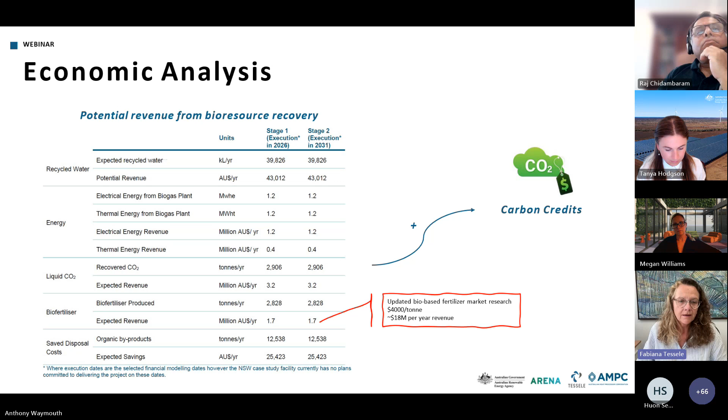And then I also have savings in disposals of around $25,000 a year, plus carbon credits that you can obtain from replacing the fossil fuel energy with renewable.

So in terms of CapEx and OpEx and return on investment, scenario 1, meaning implementing the entire system at once, is the most attractive financially. You have a very high return on investment.

The payback time is a bit long. It's about 7 years. And that's because you have the initial implementation of the project where you don't have any revenue until you have startup. So there is a long time, like almost 2 years, that you are investing CapEx before you get operational.

So there are differences. Scenario 1 would be the most attractive with a very good return on investment, in total a net present value of $222 million. That means invest $60 million now and you return over the life of the project $220 million.

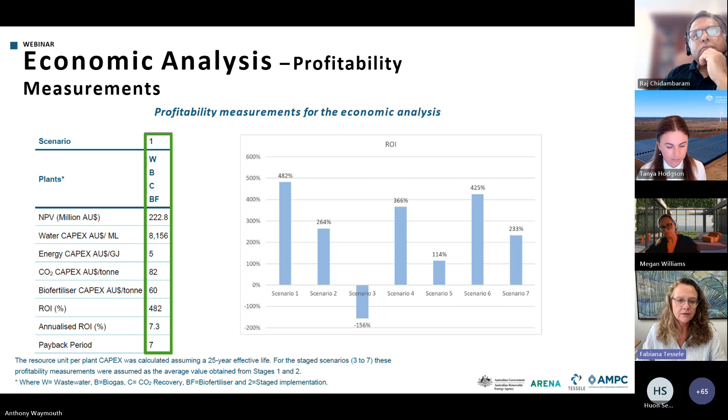Which is quite attractive considering that until now, waste management and all these things are normally only a liability. Here, in the integrated approach, we can make it another source of revenue for the industry.

So here is just a summary on what we can achieve in terms of recovering resources. We can recover water, biogas, electricity, CO2, and biofertilizer in different forms.

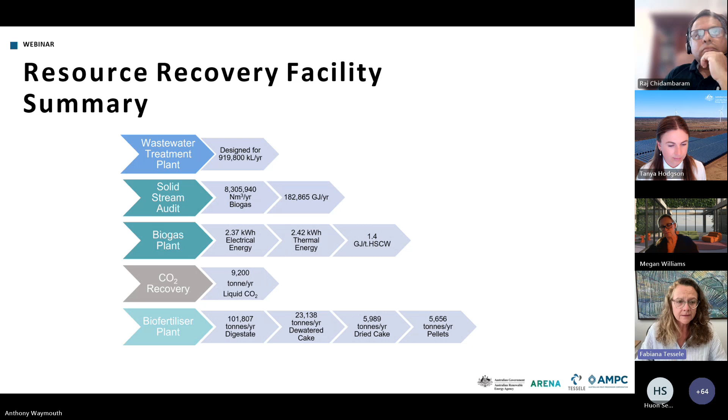And here, what we thought of doing is: okay, Bindaree Food Group is one of the 10 biggest red meat processing plants in Australia. So what happens if we do it for smaller producers? How can you adopt that at a different scale of production?

You still have a good return on investment. It's a little bit longer - you get closer to 10 years - but you still can have a positive cash flow, a positive return in the end, even though it's a longer payback time.

So it is applicable. This concept is applicable, I think, for medium to larger size facilities, which is the majority of the production in Australia in terms of tons of carcass weight.

So that's very critical - when we assess an opportunity like that, we need to understand if there is a market or not for the bio CO2, because the feasibility can change.

Another good part is from biofertilizer, from the energy, and from the carbon credits and the recycled water and savings from disposal. So it is a combination of factors that make this project feasible.